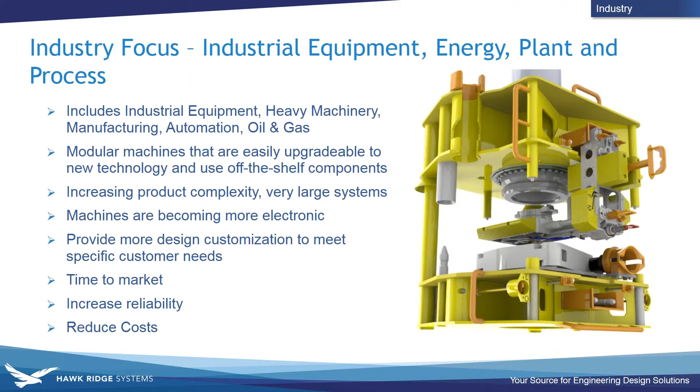So again, some of the more specific challenges shared with all these. On the quality side, we need to have a paper trail for our design process, so we know we're always working on the correct versions. We have a good history of the development as we've taken this product from just an idea all the way through manufacturing. So there's a great data management product in SolidWorks Professional, which you would receive if you buy SolidWorks Premium with this promotion this month.

Governmental regulations and compliance, it could be environmental things, safety, and again, having a paper trail without having to do it manually. So you can always show what was done at any point throughout the design cycle. There's performance goals that we have to hit. We need to know before we make one of these machines that we are going to hit those. We're going to get predictable performance. If we put things out in the field that are going to break, that's going to cost us a lot of money.

Okay, in terms of reducing costs, we need to always improve our margins. We need to eliminate rework and mistakes that we find after we've already built a prototype, or even worse, once we've started building these things. To find a problem can be devastating, so we need to have the tools up front so we can check all these things and know that when we do build this, it will work.

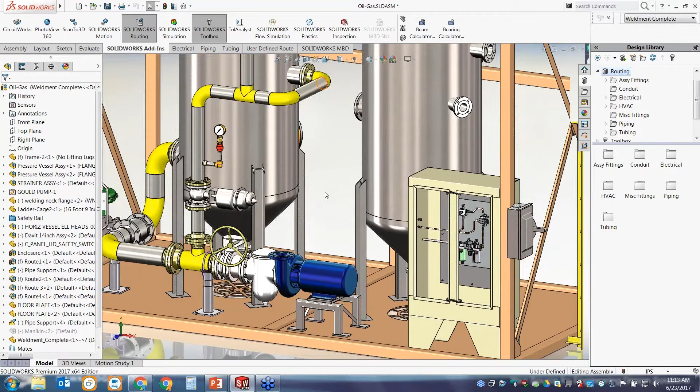It could be rigid piping, it could be flexible hose, it could be wire or cable harnessing, but all of these things permeate these products, and we want to build those into our 3D model because it gives us an accurate bill of materials. It helps us see if there's going to be any problems with fit or finish, rather than finding that out too late down the road. So we want to model that in while we're designing this thing.

Most people, if you're not using SolidWorks, you kind of have to wait till the end, and then you may find problems which are going to set you back. So let's jump right in here and make a pipe spool just so you can see how little work it takes to get something very complex.

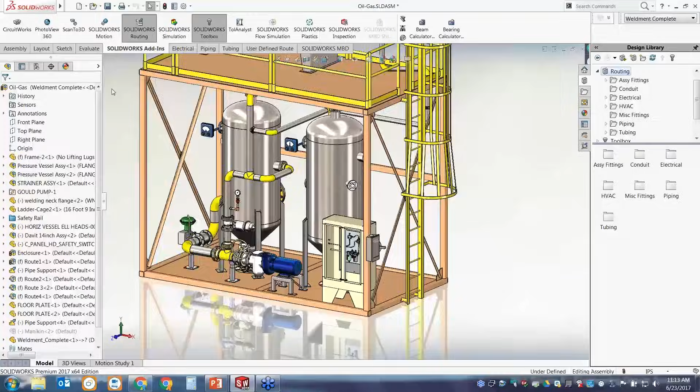All right, and this first thing I just did there was using a display state. Again, we're talking about very large, complex systems in this industry, and so we want a lot of tools to be able to manage our assembly, whether it be for performance with very, very large assemblies. SolidWorks has excellent performance management tools for large assemblies, as well as visualization tools like these display states.

Even though the whole assembly is open, I'm not working on the entire assembly at all times, so I want to be able to focus and visualize in the area of my responsibility. So display states is a great way to do that, and it allows me to hone in on what I'm working on here. All right, so let's look over in our library here.

So with SolidWorks Routing, again, this is for doing routed systems: rigid pipe, flexible hose, wires, cables, ducting, cable trays, any of those kind of things that go from point A to point B and branch off and either organize things or move fluids.

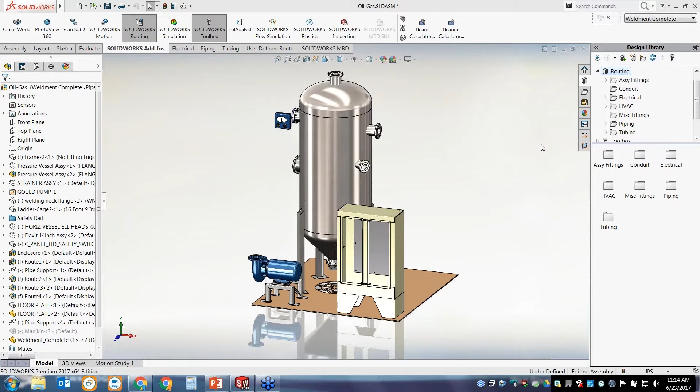Again, they all behave in similar ways, different cross sections, but I want to be able to do it quickly, and I need an actual accurate version of it in my 3D model, so that, as I said, for purchasing and bidding, my bill of materials is correct. All right, so we're going to start off here, and what I need to do is a pipe spool that goes from this blue pump down here and connects into this vessel up here, made out of rigid piping.

Okay, so I'm going to go into my routing library, which has a lot of things in here, and I just want to show, we can, with 3D Content Central... A lot of this, in these industries, we're going to be using a lot of vendor parts. Our expertise is how to integrate things and how to innovate and get a solution at the end using these off-the-shelf components and our own knowledge.

Okay, so lots of vendor parts, motors, actuators, valves, motion control, rails, electrical connectors, lots of things like that that we're going to be using off the shelf, and we can get 3D models right here directly from the vendor itself at 3D Content Central. It's free here, and it saves us the time from modeling this part. We can go in and configure it, and we'll get an accurate 3D model.

They're certified models that we can then throw into our assembly and not spend any time on that, again, because it's just off the shelf. We're not making any changes to these things, but we want to integrate them into our designs. So that's one way.

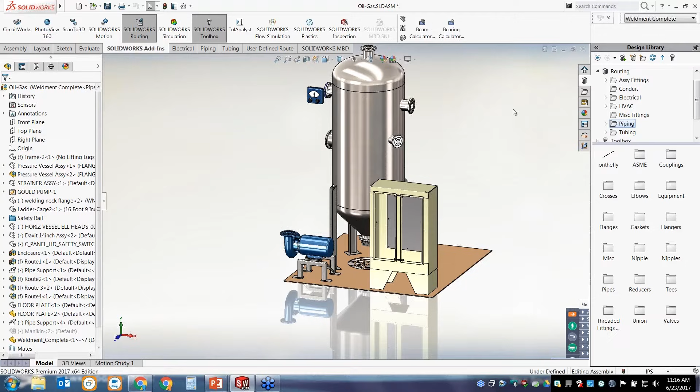The more generic type things like fasteners, gears, bearings, bushings, those are also in the Toolbox library, which is part of SolidWorks Professional, which you would get with Premium, and that saves us a lot of time from having to draw any of these things in the first place, as well as size them correctly, and I'll show you a good use of that too. But again, those are the tedious things that we do over and over that need to be automated.

So let's start here with these fittings. We're going to start with some flanges. All right, I have a welding neck flange here. I'm just going to pull it out into my assembly, and you can see it there. And then as I drop it down to the pump, you notice it orients itself correctly and mates to that pump, just as I would if I was assembling this. Okay, it's chosen the correct size here at 4-inch.

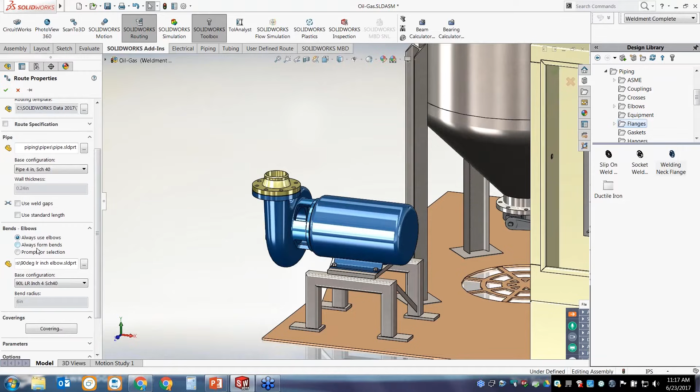All right, and now routing is going to kick in, and now we're going to set all the properties. Okay, so we got 4-inch pipe at schedule 40, so we know this whole route is going to be done with that. And I can tell it to use elbows. Anytime we take a turn, I can either bend the pipe or I can insert an elbow, and we're going to go with that on this. But again, it's just checking boxes, telling it what we want, and we let it go.

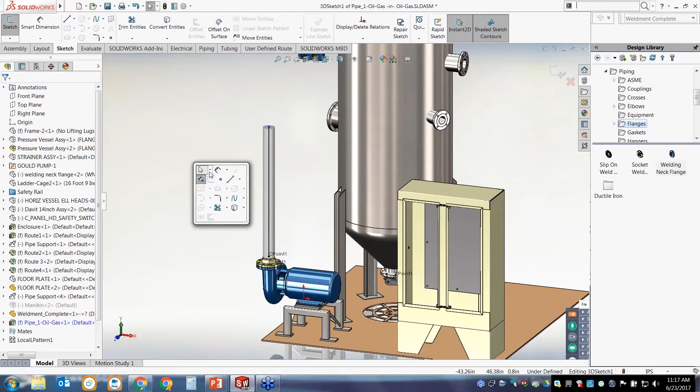Okay, so there's the start of this pipe route, and you can see it's driven by a 3-dimensional sketch line. At this point, there's no wall thickness or anything. Again, we're just going from point A to point B, and then we'll get the detail here in a second. But now I can just drag that line up. Okay, and the pipe follows it. And so now I'm in a 3D sketch, so I'm using 3D sketch lines. Let's close that. There we go.

All right, and so now I'm just going to attach to that and bring it across. I need it to come across this enclosure here. And you'll see as soon as I finish that line, it puts that 6-inch radius on center at the turn, and it's going to put an elbow there when I'm done. All right, and so now I need to go kind of backwards along Z to meet up with this other fitting up there.

Okay, and there's the other line. So you can see what it's done so far with about 3 clicks. All I'm doing is drawing some lines in 3D space, and it's taking care of the rest for me. And I can keep adjusting it until I lock it down. Okay, so where's this route going? It's coming from the pump and it's going into the vessel up here. Okay, so now I just bring in another flange.

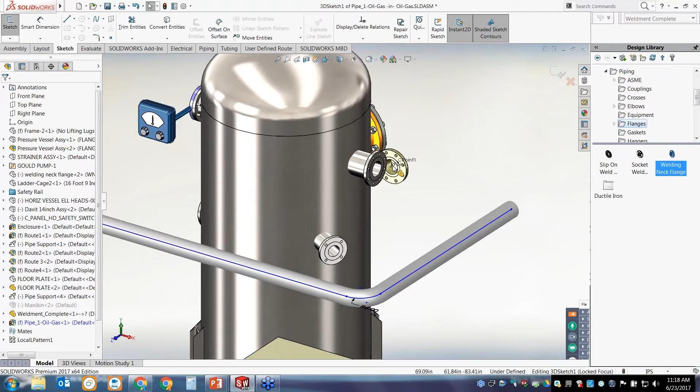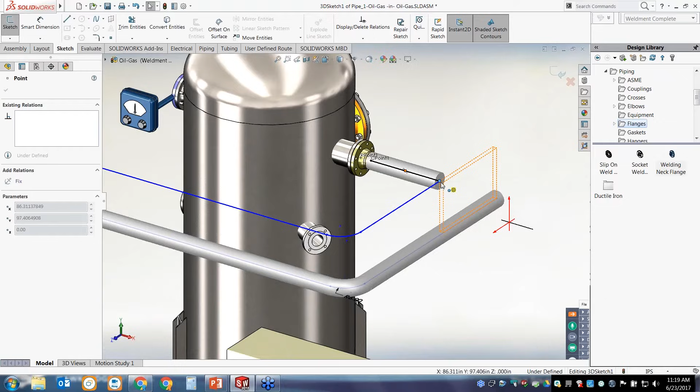All right, so we've got the 4-inch flange on there, and here's the rest of the route coming out, and I can just join those together now and watch what happens at the intersection. Okay, right there, they're joined, and then it's going to put the bend in there for me.

Now that I think about it, we can save a pipe section there, and just go directly from the elbow and weld direct to the flange. So just a quick right click, and you can see we've got some very specific commands for the piping route here, and I just want to remove that pipe.

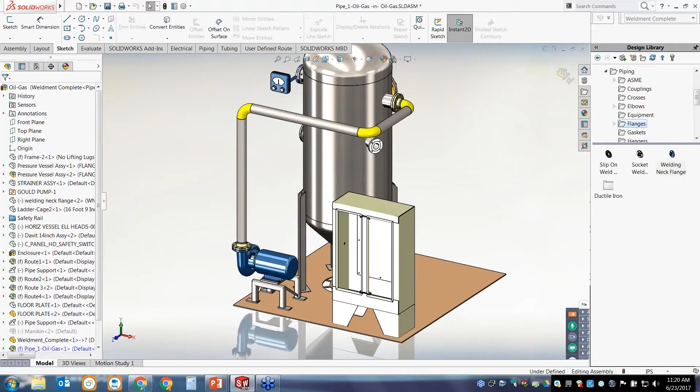Okay, looks good. Let's finish it and let's see what we get. So just like that, dropping a flange, drawing a few lines, putting another flange at the end. That's about all I did. A couple clicks, dragging and dropping a few parts. And from that, I've gotten this whole thing where I've got individual pipes, elbows, flanges. I've got a full assembly of this pipe spool so far, again without hardly doing anything.

To do this part by part by part, one by one, it's possible, but it would take a long time. And again, we have real limits on our time to market here. All right, so let's go back in and make some changes. Now we want to add some more things, maybe some branches to this route.

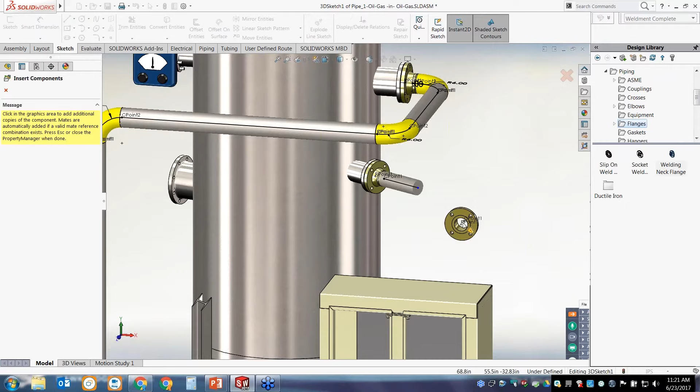Okay, so we have another, we want to branch into this connector here too. So let's bring in another flange. All right, and that one is a 3-inch. And we're stubbed out there.

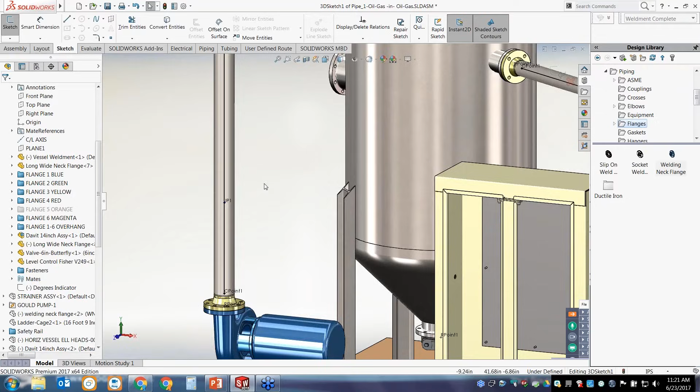And we want to connect it into this main line down here. So all I need to do, again with the right click, is just put a split in the route somewhere where I'd want this pipe to connect. And I could put a dimension on there to make it very specific. And now using auto route, I'll have SolidWorks finish that for me, make a connection from this first pipe into this main one here.

Okay, and it's as easy as just picking one point to the other. Now it's warning me here because again, SolidWorks is intelligent. It's keeping track of all these properties of all these pipes. If you remember, this is a 3-inch coming out of here, but our main route here is a 4-inch, and it's just alerting me that will need to be handled some way.

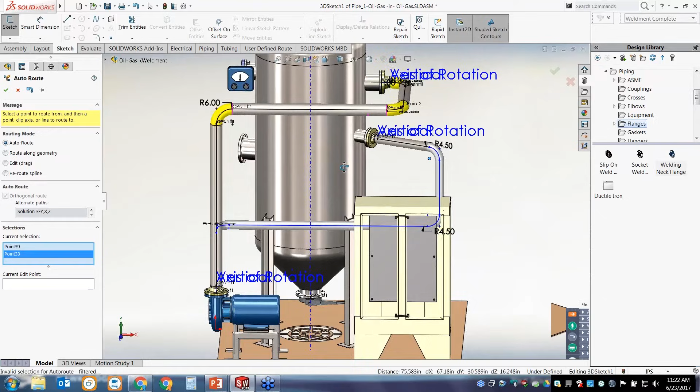All right, so that's what it came up with first. Yep, that works. Not exactly what I'm looking for, so now I can just kind of go through some different solutions. There's one. That looks, yeah, let's go with this one. There we go. So again, 2 clicks and I got this very complex route here. And since I haven't dimensioned it all yet, I can still move it up or down.

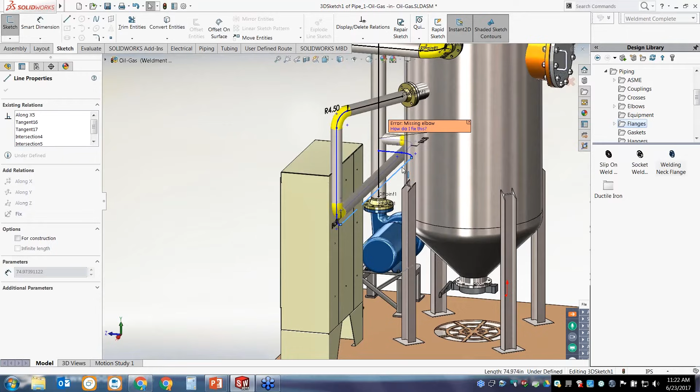I'll take this and move it back a little bit. And now again, rather than eyeball it, I can see it's a little bit tight in there. I want to really make sure everything's clearing. So let's drive it with a dimension. I'll pick this line, which is the center line of that pipe, and the back face of that enclosure, and I can put a hard dimension there that's going to hold that pipe there. Let's just say we need 5 inches. Now I can change that anytime. All right, everything fits. Looks good.

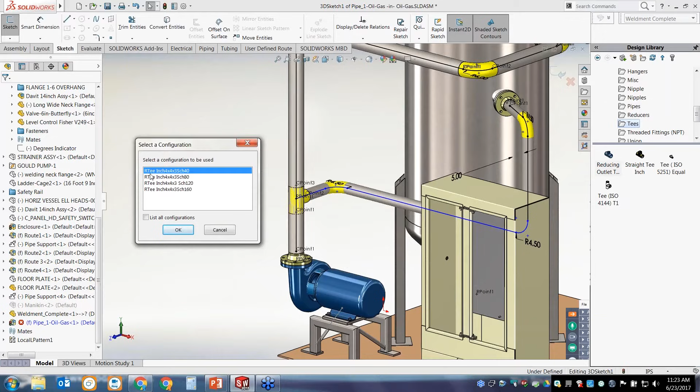Again, here's SolidWorks watching out for me, telling me I do have an issue where this 3-inch pipe comes into the 4-inch. Okay, no problem. We've got all these standard types of fittings, so we'll just get a reducing T. And again, I'll just drag this out into my assembly, and as soon as I put it on that junction, you'll see it orients itself and then correctly chooses the 4x4x3, schedule 40. There we go. Okay, so again, just as easy as that.

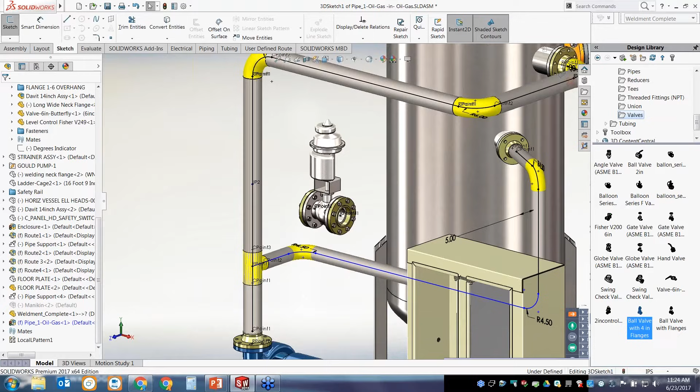If I want to put in another component here, another inline component, we'll just split the route again. Okay, so that's now a point that I can connect to, and let's go into some equipment here, like maybe a valve. All right, we'll drag this out, and this is just a SolidWorks assembly, but it's routing aware, and so now when I drop it on that junction, it's going to orient itself and place it in there. All right, looks pretty good. Again, just some dragging, dropping, and some simple 3D line sketches.

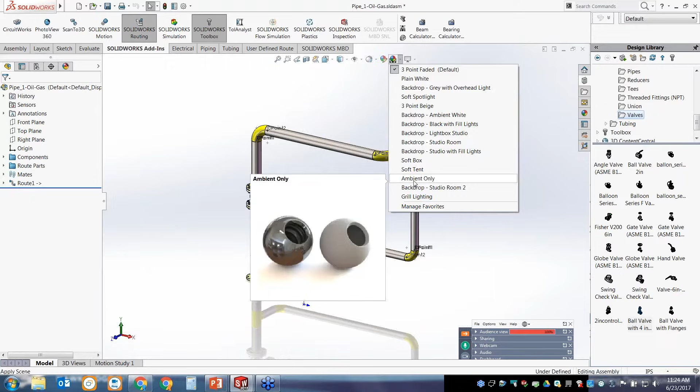I'm getting a lot of work done here. All right, so let's open that so we can really see what we've gotten so far. All right, so here's this pipe spool I just created in the context of that assembly, which is good. So I know if the vessel ever moves, these pipe routes will go with it, and all that will update because we're in parametrics, and that's what it does for us. We could do a little bit more work here, but again, it's just interesting to show.

I basically dropped a few flanges, dragged and dropped a few flanges from my library, drew a few lines, put a couple splits in, dragged a couple of other components on there, and what I've gotten by doing all of that is all these individual components. There's the elbows, you can see.

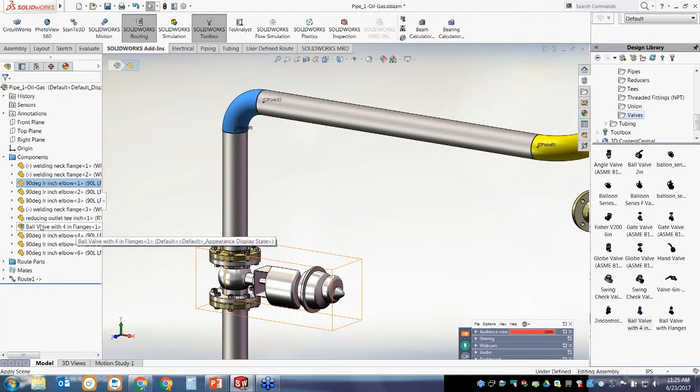Okay, the other assembly pieces in there. Here's the T. Again, separate components, so I'm going to get an accurate bill of materials as well as all the individual pipe pieces. You can see whenever I split and put this T in here, it trimmed up those two pieces of separate pipe now. Everything is accurate as well as being really fast.

Again, at the bottom, the whole thing is just driven by this three-dimensional sketch on center line. It's very easy. You can see a lot is happening in the background that I don't have to worry about, which is the way I'd like to keep it. All right, let's put a few other pieces on here.

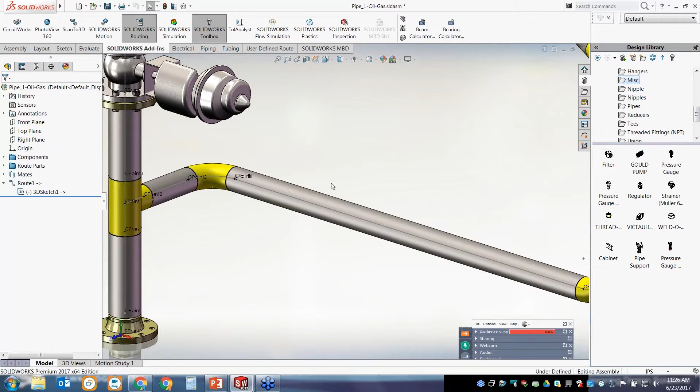I need to put a pressure gauge here, so we're going to mount it with a threadolet. Let's drag that out. We'll do a 3x1, so it goes on the outside of a 3-inch pipe, which is correct, and it's got a 1-inch inlet.

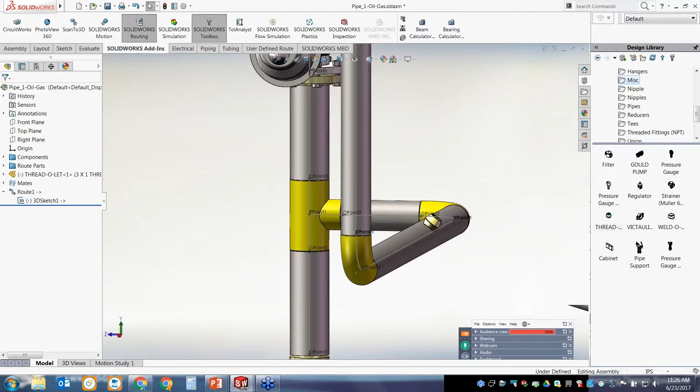There we go, and again, for production, I would route this thing correctly, I would line it up, make sure it's vertical. That looks pretty good for now.

So this is interesting. Again, talk about these tedious tasks that we constantly have to reproduce. Obviously, to anyone watching, this threadolet is not helpful unless there's a hole in that pipe, right? Okay, so I forgot to create the hole first.

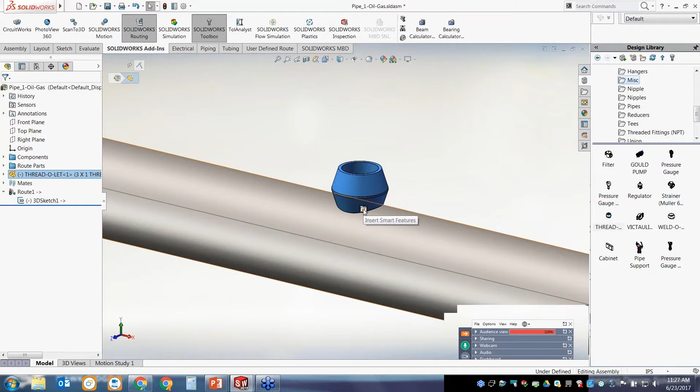It doesn't matter. You can just drop the part on there, and because this threadolet is a smart component, it comes with the required features, and I can just click this button to tell it yes, I want to apply those features. You can see up here, this is what I'm going to get, this hole. That's what I want, and I want to apply it to this new tube down here. So I just need to tell it this is the new pipe. I get a green check, and that is really it.

Just like that. So if I hide this part now, you can see it cut that hole for me. If I ever move the threadolet along that pipe, the hole will move with it. Just less for me to worry about. Let the software take care of some of these things.

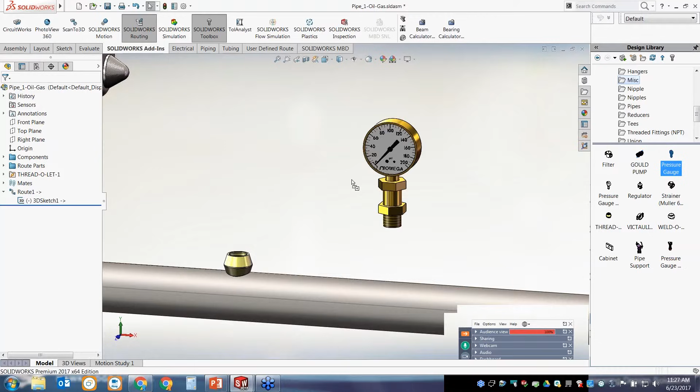All right, now that we have the Thread-O-Let, I can put the piece of equipment on there I wanted to, which is a pressure gauge. Again, just dragging and dropping. This is how it should be. All right, looks good. So again, a lot of actual geometry and accurate bill of materials information from very little work.

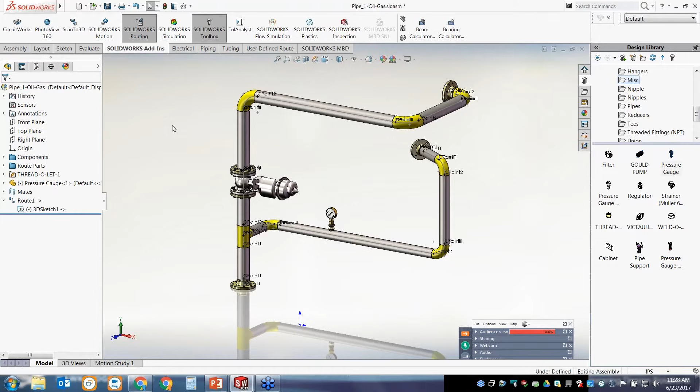So let's go and create a drawing to see how we're going to build this thing. Okay, so we've got a C-size drawing all set up. I'll just do a front view, and a top, maybe we'll do an ISO too. Yeah, that looks good, put that down here.

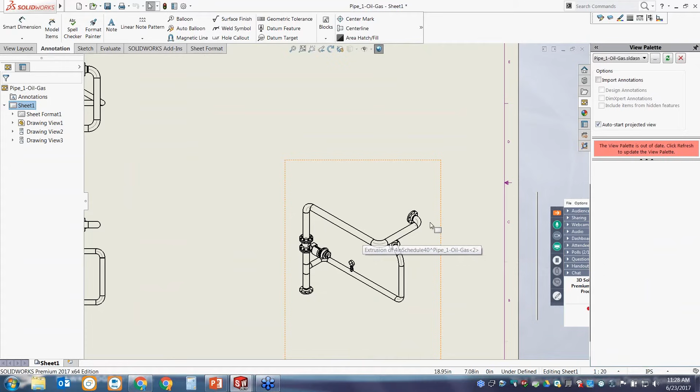I need a little bit, I don't like my scale that much. Let's go to, yeah, about 1:20, that'll work for now. Okay, so first of all, we need a parts list. We need to know exactly how much pipe of each size, and how many flanges and other components we need to get.

So the first thing we're going to do is drive one of the SolidWorks bills of materials. All right, and just like that, I have all this accurate information. You can see I've got item numbers and quantities. There's those welding neck flanges, the 2 4-inch, quantity 2, I remember doing that. And then there's the 3-inch, only one of those.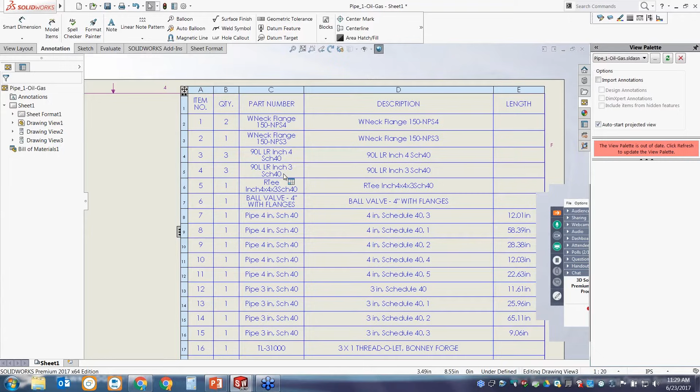And the number of elbows, everything is counted in the actual SolidWorks assembly, so I don't have to do it manually. That's one of the advantages of modeling it in your 3D assembly, is not only do you find out problems and clearance issues early, but you get completely accurate bill of materials.

Notice when it gets into the pipes, again, we get nice descriptions and then the length of each piece of pipe, what size pipe it is and the exact length of it. Then we can go out and add another column and total all the different sizes, just like we would in Excel. This is really valuable information.

Some other things we can do is some ballooning, so we can easily match it up with the bill of materials. Automatic, which is the way I'd like it. I don't want to spend all day on this. And you can see it puts out these balloons.

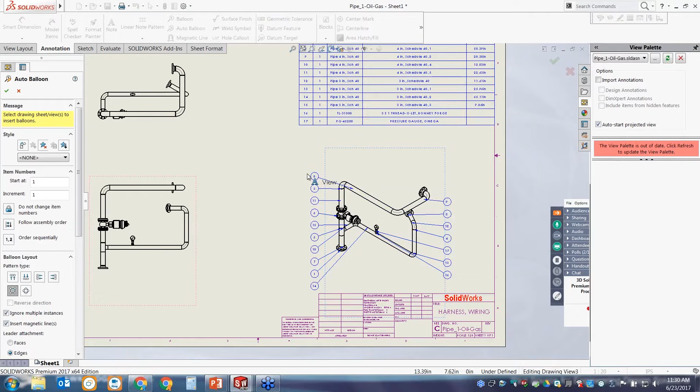And the magnetic line allows us to move things around a little bit to clean things up if we want. Spread them out a little bit. Again, get a nice, clean, professional looking drawing with very little effort. That's the key.

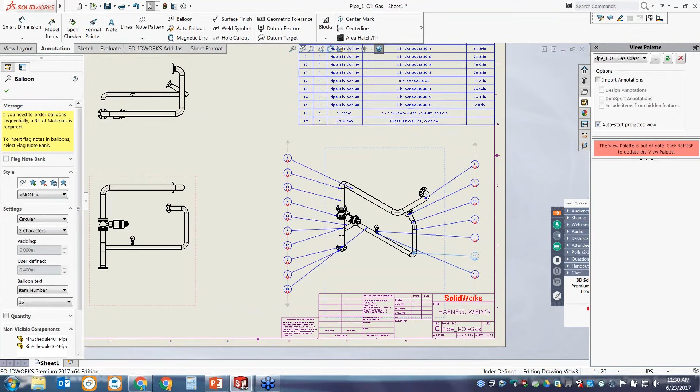All right, looking good. And again, number 3 is the elbow. Yep, it sure is. Okay, quantity 3 of those. All right, so again, it's easy to document, very little work.

Let's do a little bit more documentation here. In this assembly, we're going to turn on that 3D sketch so that now we can put some manufacturing information on here, like some dimensions. Again, I just kind of freehanded it a little bit, but in the assembly, I could put some very specific dimensions and hit specific numbers I'm trying to hit.

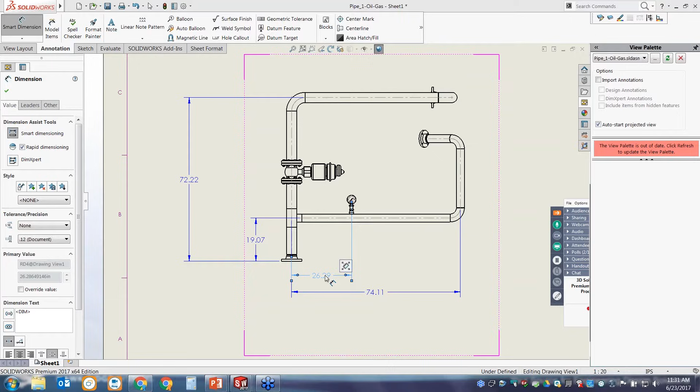There we are. We can dimension to anything, just like we could in any SolidWorks drawing. There we go. So again, very little work to create this complex pipe spool, very little work to document it accurately, and now we're moving on.

Again, with smart features too, also doing some of this tedious stuff for us. We've engineered it once, it works, we've got tooling setups for it. I don't want to keep redrawing it every single time I've got a new design.

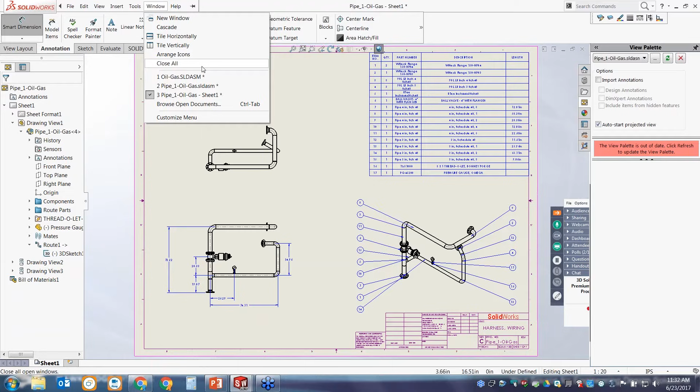All right, so that looks good. Let's close that and look at a customer who had good luck using this. Here, we'll open another part. Okay.

We get accurate bills of materials. And then not only visually, we can really see what this is going to look like, and this is going to make your bids stand out versus someone who's not using 3D.

So they were able to speed things up by 40% and reduce man hours by about the same. But again, because SolidWorks automates a lot of these design tasks, you're going to just get things done a lot faster.

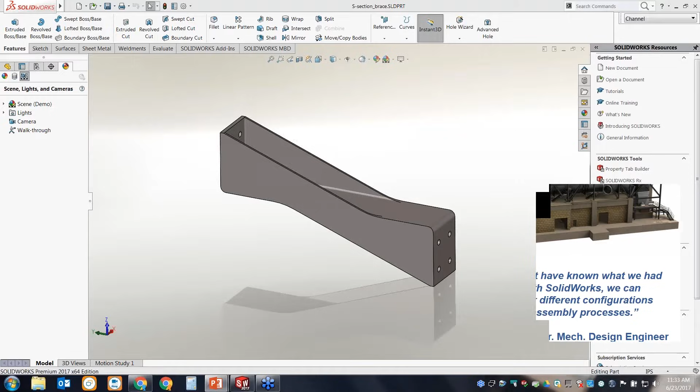All right, let's look at how simulation can help. We talked about needing safety for sure, absolute safety and reliability on these expensive projects where we can't afford downtime, we can't afford having things break. We need to know ahead of time where the problem areas are going to be so that we can design parts that can withstand it.

So with SolidWorks Premium, you get SolidWorks Simulation, which is a finite element analysis tool that we can apply loads, real-world conditions to our designs and see what the performance is going to be like before we ever have to build one of these.

All right. With simulation here, let's just load it in. Again, with Premium, you just get these extra functions and you just turn them on when you need them. All right, so let's go through a simple one here just so you can see it.

It does a linear static stress and strain on assemblies. Okay, I'm just working on a single part here, just trying to analyze this part. But again, we can do assemblies, find reaction forces and other things in there too. Just looking at a simple example here.

Let's just look at how we can explore something without having to spend any time or money building one of these things and then physically breaking it. You can see by this list here, we can do a really wide range of very complex problems. It really just depends on what you need in your environment that you're working in. I'm just going to do a simple static one here. There are higher levels of simulation so that you can do whatever complex study is necessary.

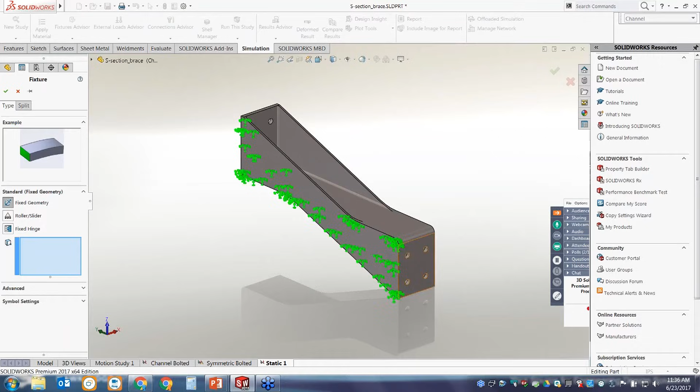We need to restrain the model before we can put a load on it. Again, for this first pass, we're just going to act as if this face here is welded to the wall, so we're just going to fix that face there.

All right, looks good. And then we need to put a load on it that's going to be hanging off this end. That's our external load, or a force. But you can see we can apply torques and pressures, thermal loads, all kinds of things on here.

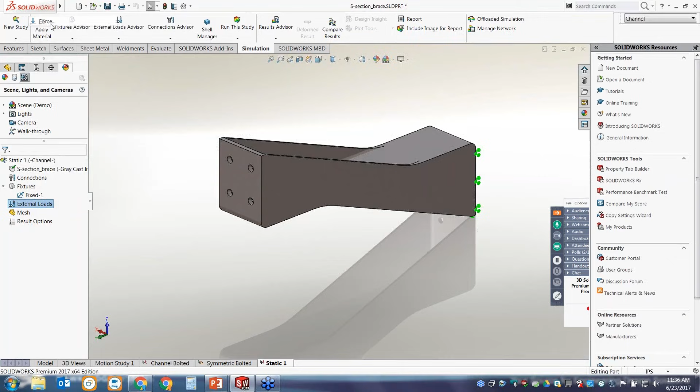Okay, I'll apply it to the force, but I don't want it acting in that direction, so we can take it and I can use a reference on the model to point the direction that I want the force to act. All right, we'll say 45 pounds—it's going to be our worst case hanging off there.

All right, so we've got a material, we've got a restraint, we've got a load acting on the model. And now it's going to mesh the model, which breaks it up into finite elements, and then run several thousand equations very quickly to find out how this model looks.

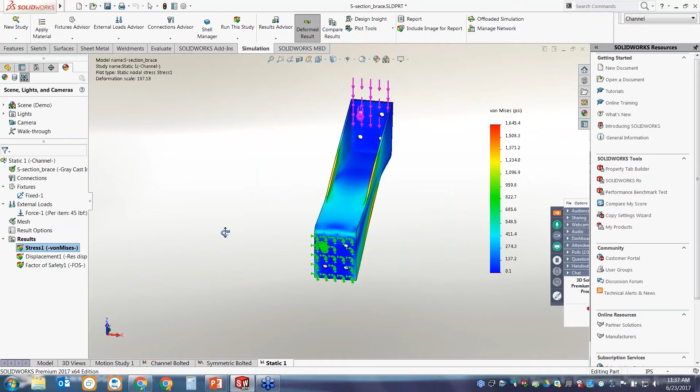All right, so we get a real nice colorful plot that tells us right away—our eyes go to the red, that tells us that's where the most stress is. Good to know. It's in the web—that's about what I would have expected. It's nice to have that confirmed.

And what are we seeing—what does that say, about 1600 PSI? Okay, good to know. It's well below the yield strength.

All right, so now the way we can explore or iterate here—this is again a huge time saver. So right from here, I want to try the same test on a different design and see which one is better. Makes sense, right?

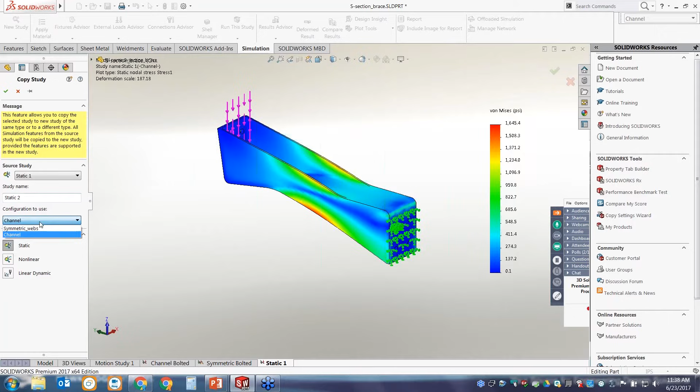All right, so we're going to copy this study. We'll call it static number 2, and it's going to be on this other configuration of the model, and you'll see it change here.

Okay, so we could have gone in and changed the geometry—made it longer, shorter, thickened something up, thinned it out, or changed the fillets. Or if we've got two different configurations, which is another way to manage multiple part variations and assembly variations, we can just call up the different configuration of the same part and run a study on that.

Okay, so you can see it's got the single web now instead of the two on the edges, but everything else is about the same. You notice I don't have to redo the fixture or the load or anything. Because the geometry is different, it does need to run the study again, but that's it—I don't need to put in any more effort other than copying that study.

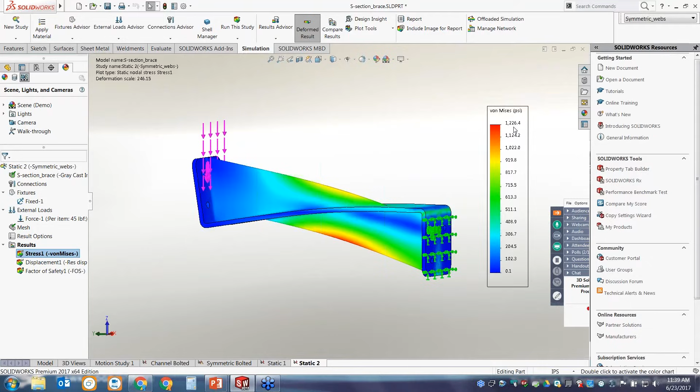All right, so here's what this other one looks like. Okay, stress is in the web where I expect, but notice that we're at about 1200 PSI now, so I already dropped by about 20%. That's interesting—that's good information to have.

Okay, so maybe this is the way to go. You can see how you can quickly try different ideas where it's very cheap to do it on the computer with just you and SolidWorks simulation, versus a master machinist building a prototype and a physical testing rig, putting a load on it, trying to break it, finding something out, and then having to make another prototype to try our improvements. Here we can do our improvements in multiple iterations to find which one is going to be the best.

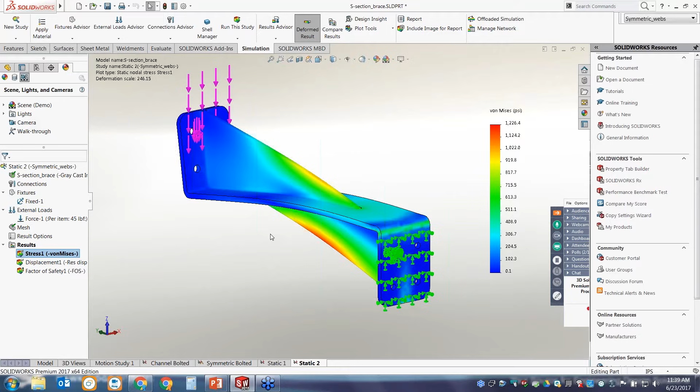All right, so that's just a very basic look at SolidWorks simulation, but it gives you great engineering insight into your designs and how they're going to perform when they get out into the real world. And we need to know that up front, so that we don't need to make as many prototypes and we can get to market a lot faster.

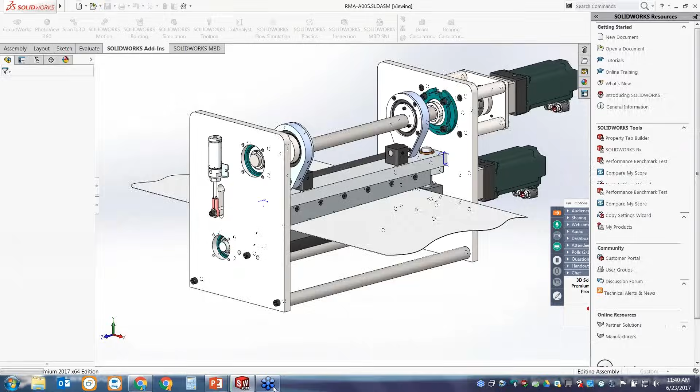All right, we're going to load up a model and look at another happy customer who used simulation. This is a local customer to me down here in Southern California. Wiggins Lift makes very large, very specialized forklifts for moving boats around in marinas. As you can imagine, nobody wants their boat to be dropped off of a forklift that just broke. So these things really need to work. They really need to be able to handle the loads they're designed for, and we need to know up front if there's going to be any problems.

So they were able to use SolidWorks Simulation to get their forklifts. These things are one-offs, and they need to be done really fast. Okay, so this project for the Sea Ray 370 was the world's largest boat handling forklift, and they did it in 2 months from start to finish. And simulation had a big factor in that because they weren't welding up as many prototypes.

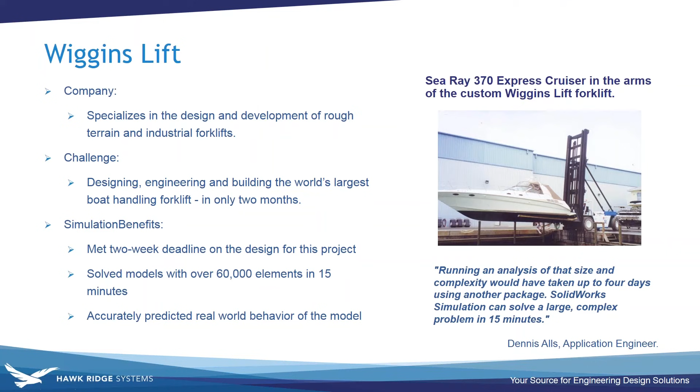All right, so let's look at another way we optimize for manufacturing. Again, tolerance is everything. We'd like to be as loose as possible because that's the cheaper way to machine or manufacture things, but it doesn't mean that our designs will always perform if we're too loose. So we want to manage tolerances, make them tight and critical where they need to be for function, and let them be loose elsewhere where it doesn't cost us as much money and it's not as big a factor.

So this is a sheeting machine. It's for cutting material. Again, using a display state to help me focus a little bit more on the blade system here. You can see how it works here though. It's just a camming or an eccentric drive here that pushes the blade up and down as the material moves through. Okay, simple enough.

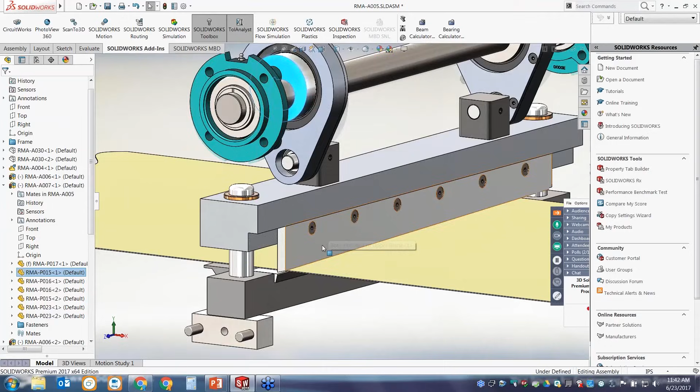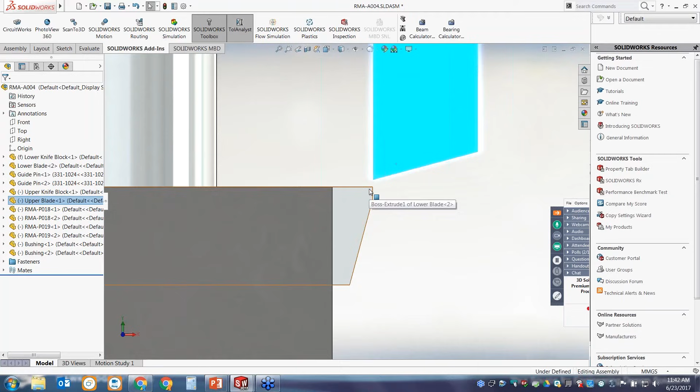Okay, but as you can imagine, the distance between the two blades here, that's critical, right? Too far away and it's not going to cut the material. Too close and we're going to get a crash and the machine's going to eat itself, and that's really bad too. One way it doesn't function, the other way the machine destroys itself. So we need it to be right.

Okay, so what we do is we use DimXpert to tolerance our part. Every part that's involved in this tolerance analysis study needs to have, at least for the features that are being studied, the DimXpert tolerancing information on it. So we've got a scheme on here that we think we like, but again, we need to run an analysis to make sure that things are going to function. Okay, so back to the assembly. All right, let's take a look at this study that we've got in here.

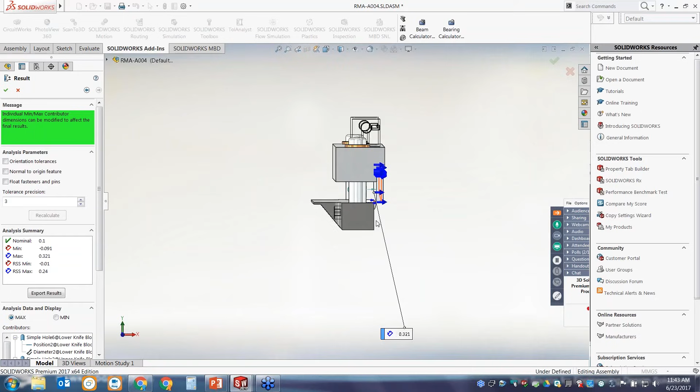Okay, first of all, we solve for a dimension. And again, that dimension is the distance between these two blades here. I have a goal. Right now, it's modeled nominally at 0.1 millimeters. But I know that's not always going to be that way once we start manufacturing. So it needs to be between 0 and maybe 0.25, we can live with. Definitely can't be negative, because that means the blades are crashing into each other, and bigger than 0.25 for the material we're cutting means it's just going to put a crease in it. It's not going to cut it.

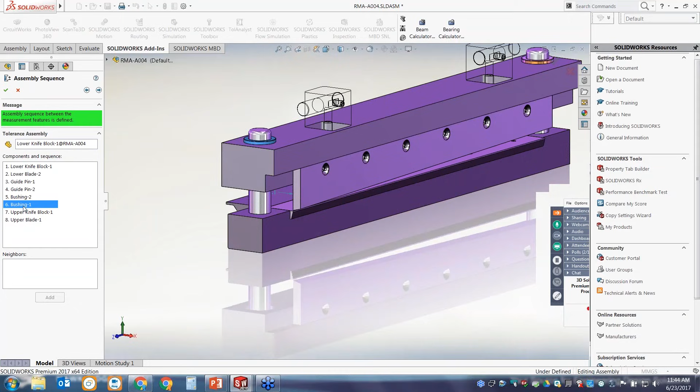Let's go back a few steps. What SolidWorks does is it looks at the order that the parts are assembled. So we have the base block, then we have the bottom blade, then we have the guide pins in there. You can see these vertical guide pins. Those are placed in the lower block next. And then we have the bushings guiding. Then the top block, and then the upper blade goes on. So it looks at the order that things are assembled.

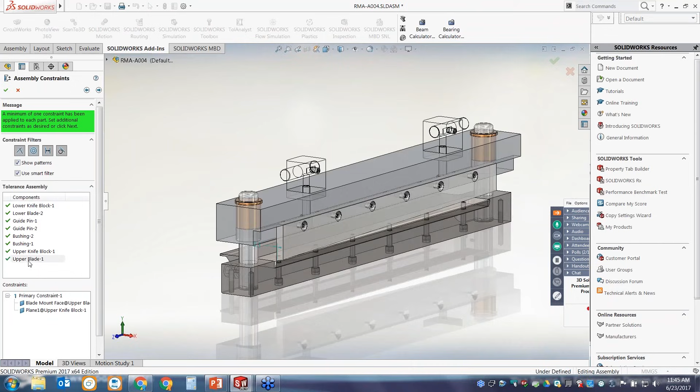Okay, and then at each condition where parts meet, we can tell it which is the critical constraint. So like this upper blade here, let's bring this down. You can see that the upper face mates up against that top block, but that's not really going to affect the distance that we're trying to solve for. Whether that's up an inch or down an inch doesn't really matter to that other distance, which is 90 degrees to it. So we tell it that this is the more important constraint here, those faces as they meet up, because obviously if one of those faces moves, that distance for the cutting moves. So you just tell it that's the important one that I'm trying to solve for.

Okay, and then it just looks at all the DimXpert information on all those features and what the tolerances are, and it runs an RSS study, and it gives us a min max. Again, the nominal is 0.1, which is how we modeled it, and CAD models are perfect. The min is negative 0.091, so that's really bad. That's the blades chewing on each other. Max is 0.321, which is, again, too big.

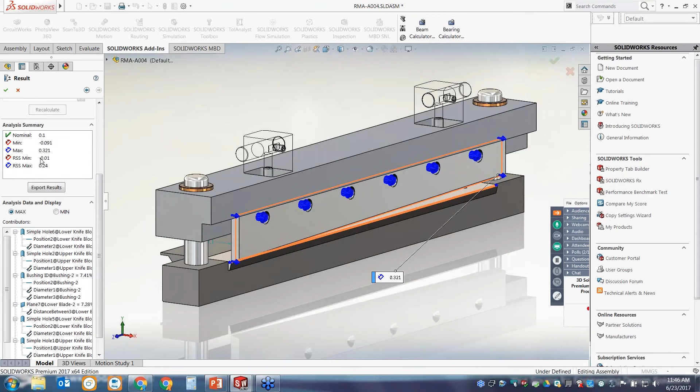So we're trying to tighten things up a little bit, and so here's where you get what you pay for. Not only is it telling you what the min max are, but it tells you what the major contributors are. Okay, so at this first one here, let's see, there it is, 52%. So that's the largest contributing factor to the min max.

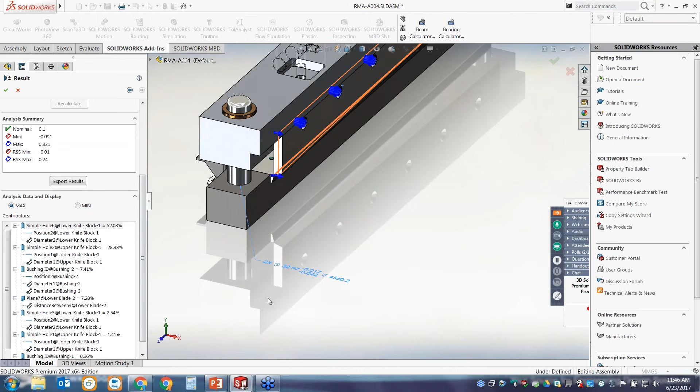So we select that, and there's that DimXpert information, and we can just click on that and pull up the tolerance. This positioning tolerance at 0.2, maybe that's a little bit too loose. Let's go 0.04. So we're going to tighten it up quite a bit. And we have to understand, that will be a little more expensive to machine. But again, we need it to work. So just by making that change, then we recalculate.

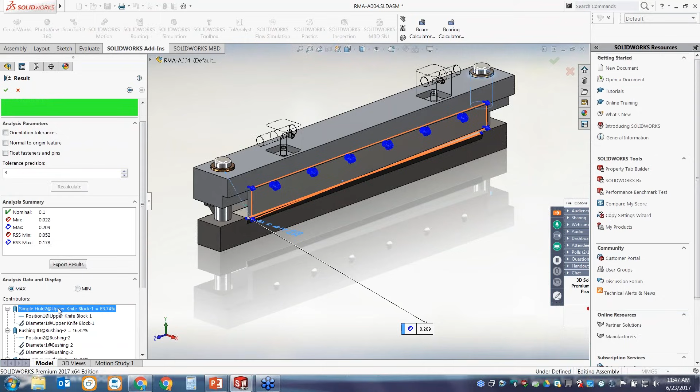So just by doing a what if I tighten up this one tolerance for these guide pins? Now we see, at least we're not negative, so the blades won't crash. 0.022, and our max is 0.209, so we can get a little bit bigger on that end. So here's another one where these bushings fit in. Now what's the biggest contributing factor? It's these bushings, 64%. So I'll go in there and I'll tighten up that tolerance too.

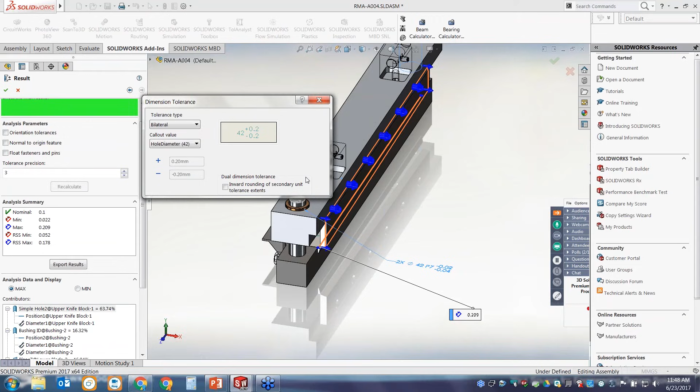And you can just see that's how you slowly do what if scenarios on your tolerances until you get the range you're looking for, and you can always be looking at the cost for tightening those tolerances too. This is really valuable information to find here rather than trying to do it in a spreadsheet, manually referencing certain nominal dimensions. It's looking at the model, at the features, at the DimXpert tolerances that are already on the 3D models. It's crunching the math in the background to give you these RSS and min-max.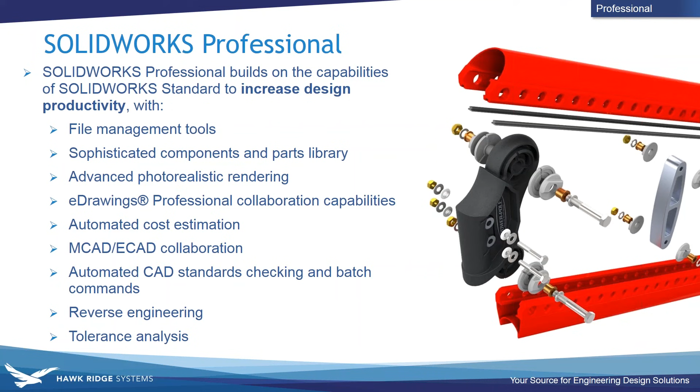Great way to communicate. Cost estimation, printed circuit board integration, again from PCB CAD. Those files are tricky to get into parametric mechanical CAD. CircuitWorks, which is part of Professional, makes that very easy, and it's also two-way. Reverse engineering, so we can scan objects and bring them in and get 3D models for that, for things like ergonomics. Tolerance analysis, what you just saw.

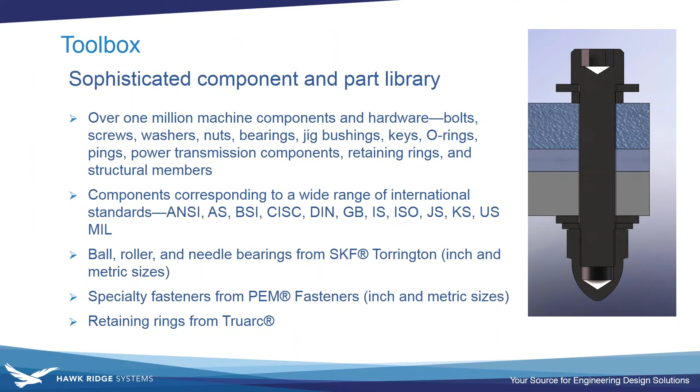Okay, so PDM Standard, as we said, it's for smaller groups, but it does revision control and workflows, very basic workflows. There's a higher level depending on how big your group is, and other things like multiple locations and things like that. Just know you will get the tool that will help you do that in this package. Okay, a little bit more about Toolbox. Again, not just ANSI standard too, all kinds of international standards and sizing increments based on those standards, over 1 million different parts. Again, if you use a lot of hardware, which this industry does, there's just no time to be drawing these things yourself.

Okay. The visualization tools for photorealistic rendering, again, if you need to, for a bid or some kind of price estimate, because you've already drawn it in 3D, if you want to include a realistic picture of what the installation is going to look like, again, that just makes you stand out of the pack versus your competitors.

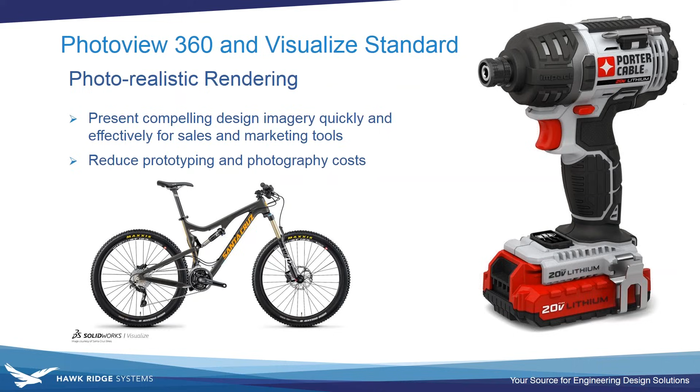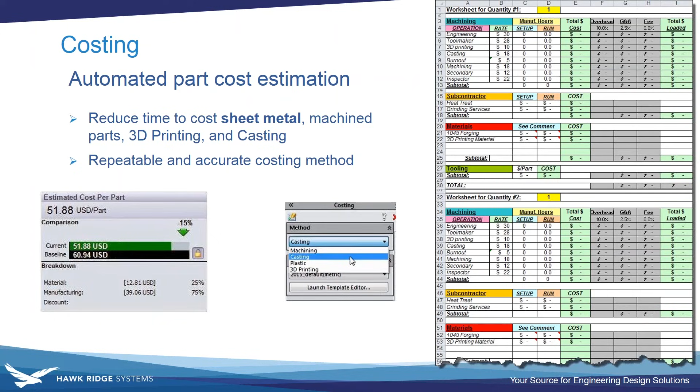Costing, rather than again using tribal knowledge and spreadsheets, looks directly at the 3D model. It collects things like sheet metal bends and perimeters and things like that, and runs it against your own information on maybe a laser cutter or something, and gives you a cost estimate built right into SolidWorks, which is really nice.

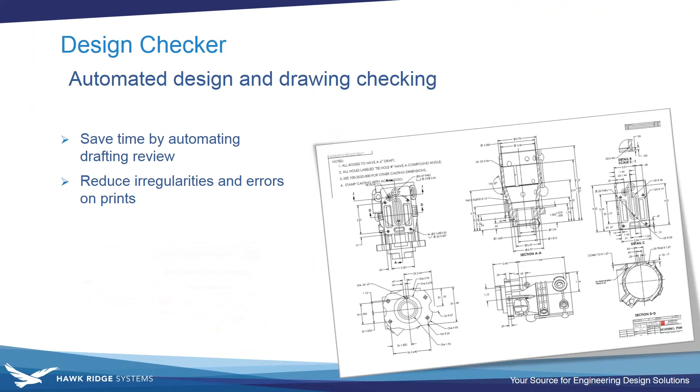CircuitWorks, as I mentioned. Design Checker allows you to set up your company standards for drawings. And then every new drawing, you can just have a batch process run against that to check, so you don't have to do it manually, which takes a lot of time and which is almost impossible to get correct every single time. Yeah, there's also a command, if it finds errors, it will also correct them according to the standards.

Okay, let's talk about tedious work being automated. Especially if you have a stack of drawings, Design Checker can save you a ton of time. You can also batch process it to do it while you're not even at work. You can batch process other operations too, again, to happen at off times. But again, you can see the value here, like something like export files.

Let's say you had a new project and you want to export all the machinable parts to STEP files for the machine shop. Okay, without Task Scheduler, which is included in Professional, you'd have to open every part yourself, one by one, save as, STEP, close the file, open another one, save as, STEP. If there's 50 files, that's going to be taking you a long time.

Whereas with Task Scheduler, I can just point to that folder and say at 7 o'clock tonight, every part file in that folder I want saved as a STEP file and saved to this other folder. Go. So I set up that command, and then at 7 o'clock, that happens. SolidWorks fires up automatically, opens every part, saves a STEP, done. You can just see where that's not really a good use of my time. So that's a big time saver there.

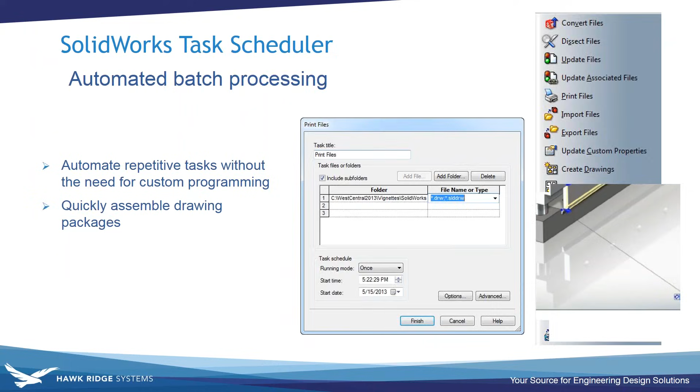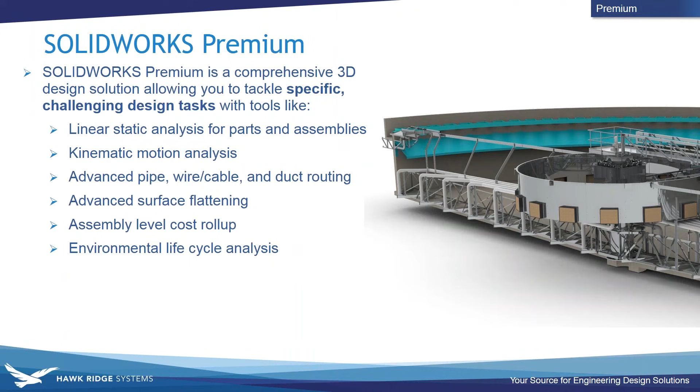Okay, ScanTo3D we talked about, reverse engineering for scanning objects and bringing that in. And then Premium takes everything in Professional, includes that, and then adds more to it. Okay, and that's where it gives you the linear static stress of assemblies and parts, as you saw. Virtual prototyping, if you will, which again is much faster and cheaper.

SolidWorks Motion for looking at moving parts and mechanisms and looking at loads required to actuate certain systems, so that helps you source motors and actuators accurately. You can get different plots looking at acceleration and displacement, reaction forces.

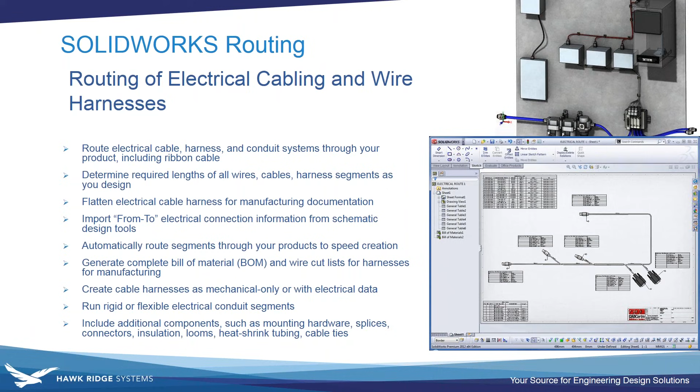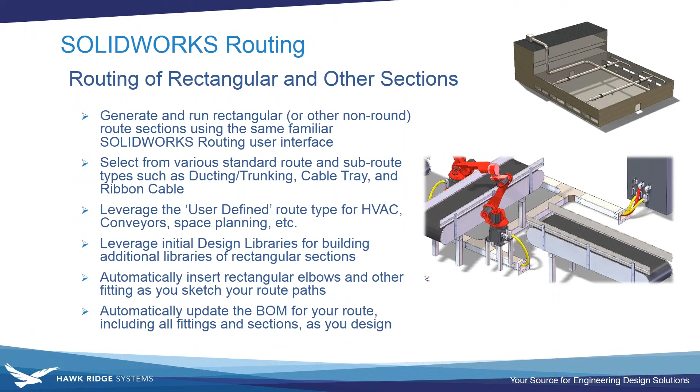Routing, as I said, piping and tubes, accurate bills of materials, as well as electrical cabling, wire harnesses, other types of sections, rectangular, circular ducting, cable trays, all using that same method of 3D linear sketches going around and then it putting the individual parts on there for you.

Okay. Premium also has advanced surface flattening, which takes complex surfaces, or compound even, with multiple bends or curvature, and is able to flatten that. So for things like graphics and textiles, it's nice to know maybe where some compression or some stretch is going to be as this flat object is then wrapped around this complex shape. And it allows us to know maybe where we need some relief cuts or something like that.

And we can get that flat pattern of that surface in a DXF or DWG file so we know what size to cut to fit. So again, it's very specific, but it's very powerful information.

And the last one is SolidWorks Sustainability. So for those of you, especially in industry, if we're looking at environmental impact and we're either using it as a competitive differentiator, or if we are required by government regulations, it looks at the material that goes into your design, how it's manufactured, different manufacturing methods, the transportation, how your product gets to its final location, and then what happens to it at the end of its life.

It looks at those 4 aspects and then gives you an idea of the environmental impact so that when you make changes to materials or certain things, you'll get some feedback knowing if you're improving the environmental impact or making it worse. And it prints out an automatic report so that you can prove your life cycle analysis.